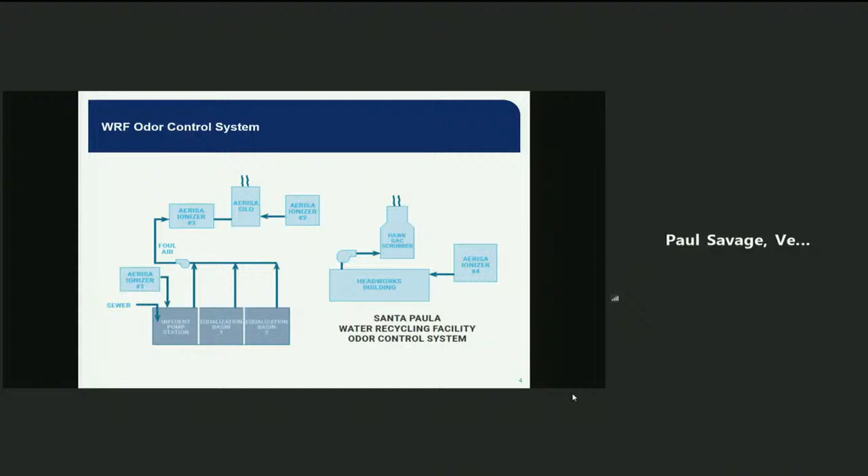So the main problem with odor control we're facing is the Aerisa unit and that odor control system on the left-hand side of that last diagram. It's occasionally overloaded, such that the air exiting the Aerisa silo exceeds the 1.2 ppm over 15-minute average limit. The permit level limit of 1.2 ppm over 15-minute average is exceeded about 15% of all the readings.

It's not 15% of every day though. For example, in April, we saw exceedances on 23 of the 30 days, at least once during those 23 days. So kind of an interesting problem, but just to give the magnitude of what we're facing.

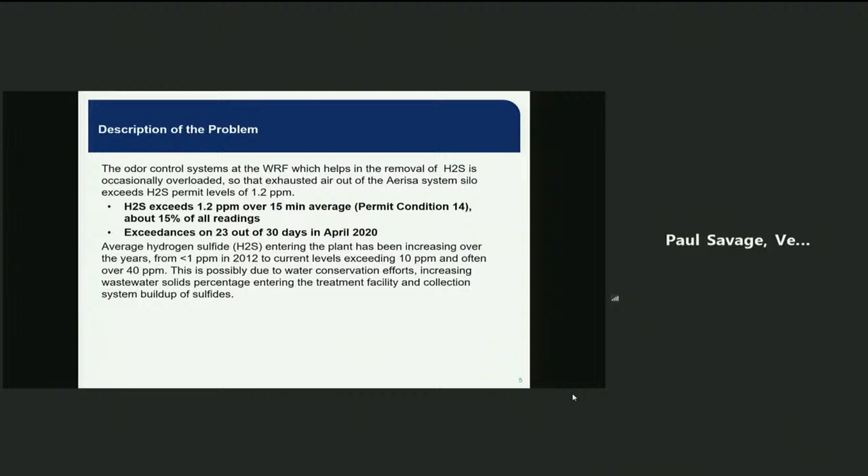Okay, and we can move on to the next slide. On here, we also know there's been no offsite odors or complaints, even though the H2S emissions are occasionally exceeding that 1.2 ppm limit. A review of the data shows that H2S normally does not exceed 6 ppm.

The OSHA limit for 8 hours of exposure to H2S is 10 ppm, so we're below that limit as well. Also, there's been no odor complaints to the city or the district in over 7 years, with the nearest resident living only about 400 yards from the site. Finally, H2S is not a hazardous pollutant per EPA.

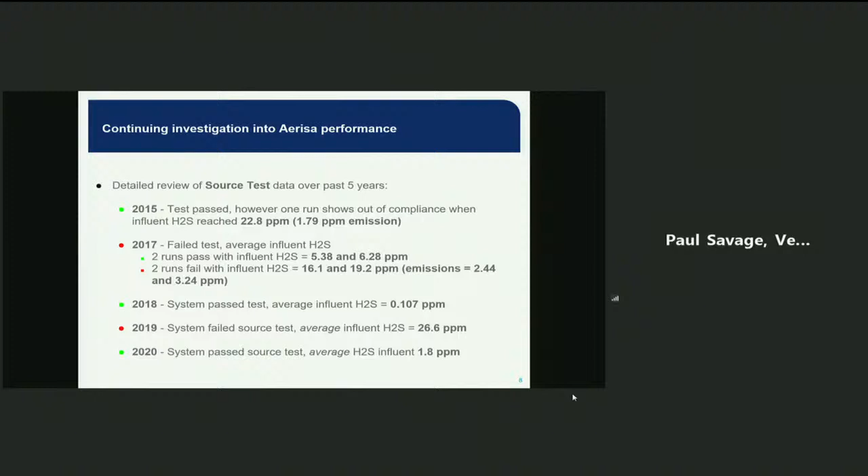What comes to light here is that over the last 5 years, when the influent H2S exceeds about 10 ppm, the Aerisa system is unable to maintain emissions below the desired 1.2 ppm.

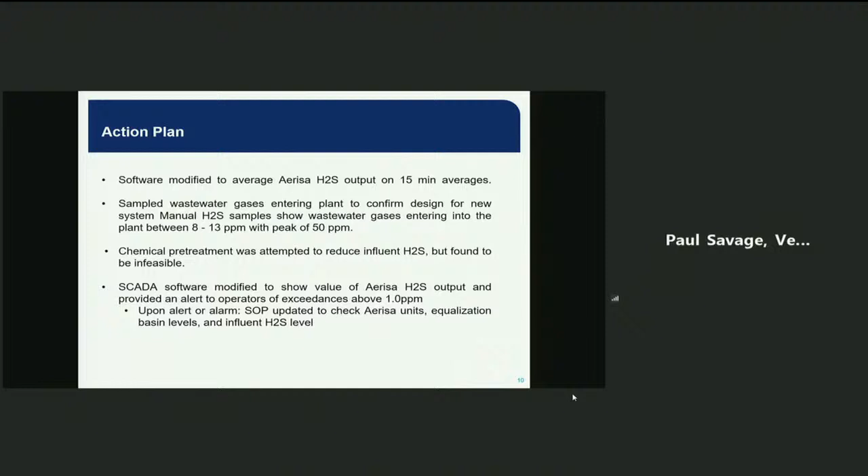And I think I'm turning this back over to Chris. Did you want to discuss this? Yeah, I'll take this, okay.

Based upon the things we've seen, I want to emphasize that over the last 10 years, we have seen increases in the H2S concentration in the sewage entering the treatment plant. We believe this is probably because of water conservation efforts that have reduced the amount of water but increased the solids concentration of the water coming in, and this has resulted in higher H2S concentrations.

Things we've done over the last couple of years to address these issues, as we saw exceedances begin to happen, the operator and the city have performed a number of actions. First, we made sure the software was providing proper information. At one time we were not making the correct 15-minute average calculation; we were just reporting instantaneous values, and that needed to be corrected to meet a permit requirement. That was done earlier this year.

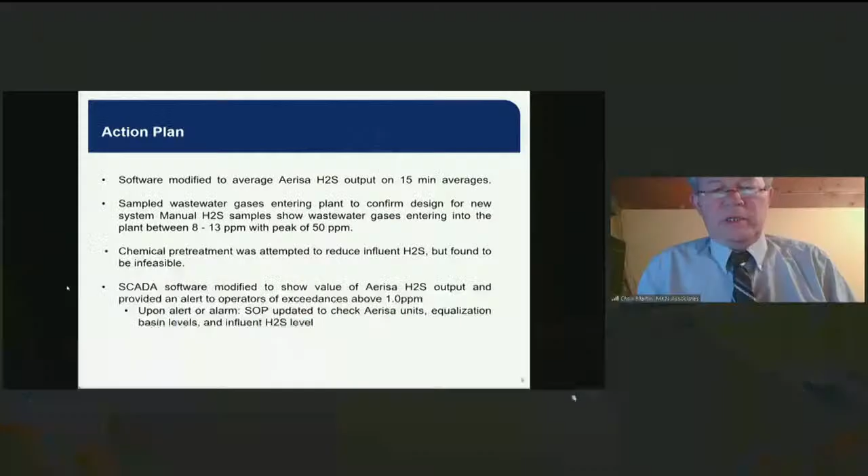I could say that it's a known behavior of sewers that the effluent is surgy. You can get bubbles of stuff coming through.

One other question too, on the spike in April this year, is that because everybody's home, you think? Could be an influence. Although I don't know that I would say that it was necessarily a spike in April this year. Oh, okay, I thought I heard somebody say. That was just an example of what we see.

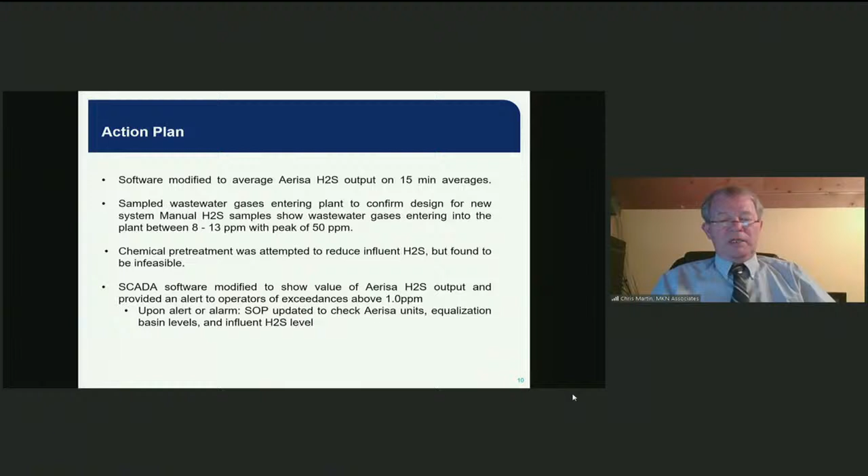Okay, next slide please. Other changes that were implemented to reduce it, and these are some of those things that began back under American Water in 2017, but have been carried through and amplified if possible.

The first item there was done recently. We had the Aerisa factory service representative in to review the system and make repairs. In addition, the on-site Veolia staff has performed a substantial amount of maintenance over the last 18 months, spending over $200,000 on repair parts and so forth to keep the systems operational.

Since the H2S is developed by bacterial action in the treatment plant, one method of reducing the production rate is to keep the inventory of solids low, and that has been done, and it was somewhat effective.

The plant is equipped with equalization basins to try to even out the flow, since sewer flows are inconstant and have substantial variation throughout the day. Equalization basins were provided to even those flows out, but they provided a location where bacteria could develop H2S.

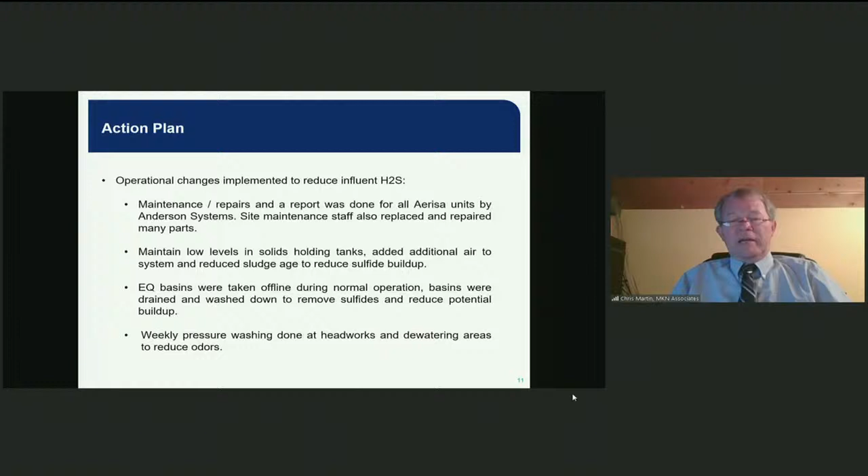So, after a lot of effort, spending a fair amount of money, the city has determined that the Aerisa system is just no longer capable of performing the work. So they directed MKN to begin design of a new system for construction and completion next summer. Next slide please.

So the conclusions that we've come to in the work that we have done: first of all, we have seen increases in the H2S concentrations entering the system, not really the H2S concentrations produced by the treatment plant, which have remained under control, but the H2S concentrations entering the treatment plant have come up substantially to the point where they are beyond the capability of the odor control system to handle them.

Second conclusion is that the operational changes made were somewhat effective. They helped, they reduced H2S production, but they are not sufficient.

Third conclusion is that the Aerisa system, it's old, it's requiring constant repair. As I mentioned earlier, we've spent over $200,000 in direct costs, plus some 400 plus hours of additional, unexpected labor in the last 18 months, and it is unable to do the job, so the system must be replaced.

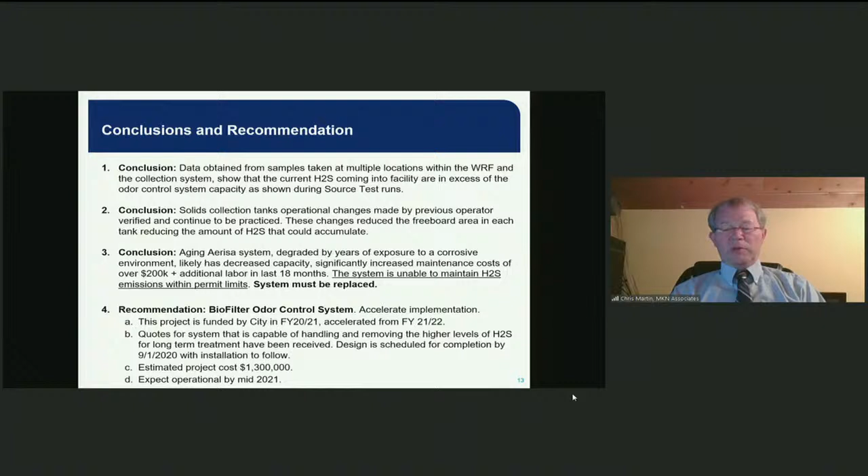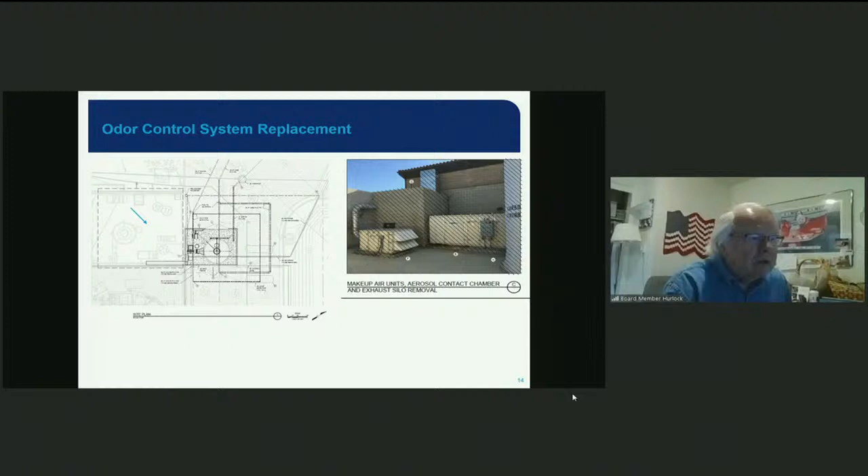You can see from the drawing on the left side. Can you hear me? Excuse me. Do you have a pointer? I do not have the ability to point at anything, no, I can try to point from my end. So are you talking about E right here? Is that where you're currently at?

That is one of the Aerisa systems, and if you go to your left, that's the second Aerisa system comprising this particular unit. That concrete block wall, just slightly up, that is the silo where the reaction actually occurs, the Aerisa reaction. On the drawing to the left, the blue arrow I've sketched in shows you the view of that photograph, that's where you're standing and looking.

The new system, or all of those units, will ultimately be removed. The new system is that darker system in the sketch, you can see the circle there, that is the new BioAir filtration system. It will be installed just outside the existing treatment plant adjacent to the wall. Note in the photograph the height of that 10-foot wall around the treatment plant.

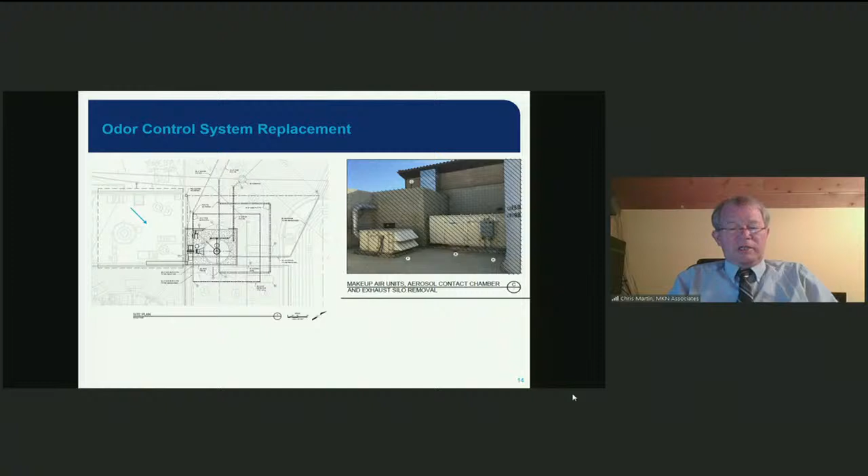So the objective will be to complete construction of this BioAir system, switch over to its operation to make sure it's working, and then take the other two units out and remove them. Next slide. Oh wait, no, go next slide.

Sorry, I did want to mention the design capacity of the new system will be 20,000 CFM, which is sufficient to take care of both the Aerisa and the HAWK systems, assuming a 50 ppm influent H2S, with a design effluent of less than 1.2 ppm H2S, which is the permit level.

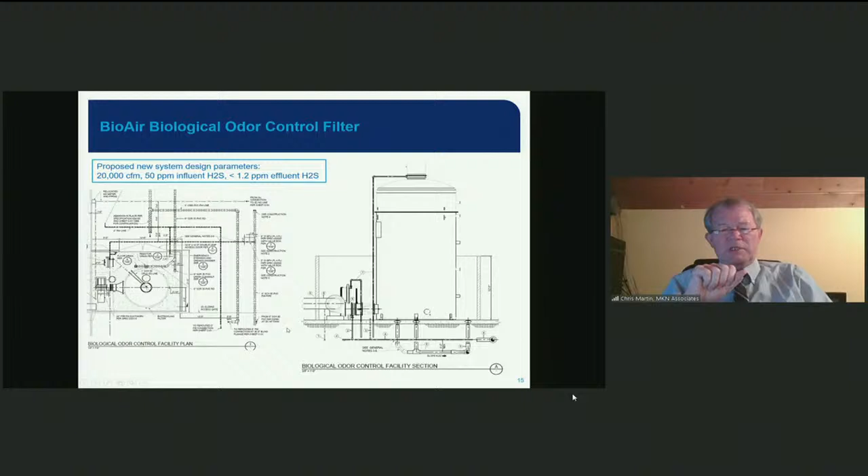Okay, next slide. With that, our presentation is complete, and we'd be happy to field any questions you might have.

I do have a question. Have you explored possible other reasons, like maybe somebody out in the community is doing something to increase the H2S? Is that possible, or is it just the concentrated influent? It's possible, but the concentrations haven't increased sufficiently to explain everything.